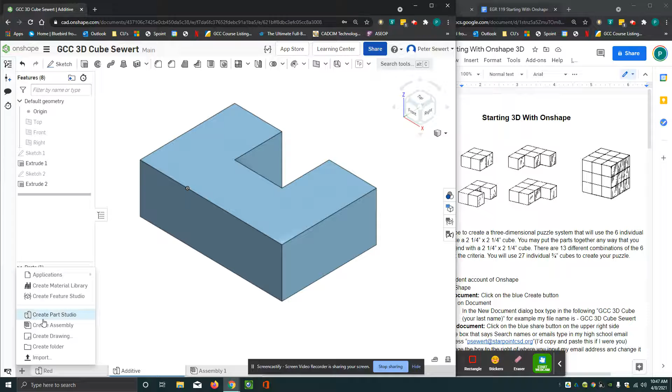So to start a new puzzle part, I'm going to hit the plus sign and create a part studio. I'm going to get my 3 views on here, my 3 work planes. I'm going to click on sketch, and I use the front work plane frequently. Right click and say view normal to.

Now I'm going to draw this U-shaped cube again. I know that we are 2 cubes high, and because each one of these blocks is 3/4 of an inch cubes, this is going to be 1.5 inches tall by 2.25 inches long.

So rectangle tool, I'm going to click on the origin, pull it out, click and type in my length, 2.25. Oops, I got to turn on my numbers like that. 2.25. That worked. Okay, good.

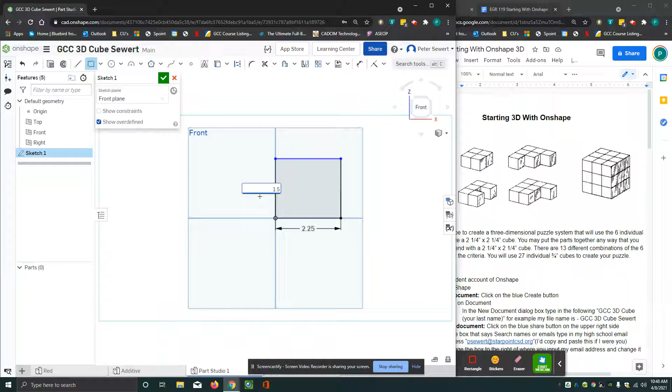Now I'm going to bring my cursor, hit enter there, and it puts me into this other dialog box. And I'm going to make that 0.75 times 2 is 1.5. All right, green check box.

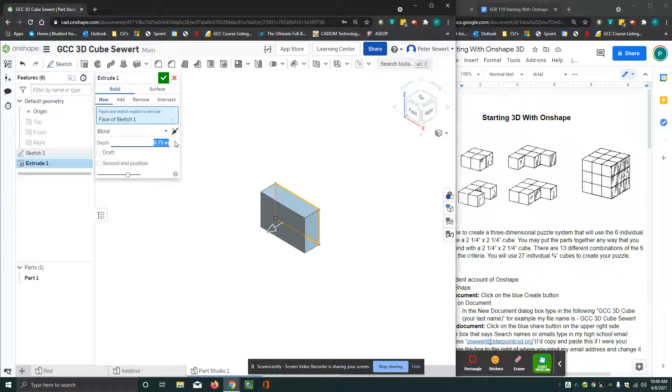Right click, isometric. I'll turn off the icons, and I am going to extrude this, and this is going to be a 0.75 inch extrusion, and I'm going to green check mark.

So we've got all this drawn here, with the exception of the center section being taken out.

So I'm going to now click on sketch. I'm going to go to this front surface and click on it, and right click and say view normal to. And all I did there was create my sketch on the front surface of this cube.

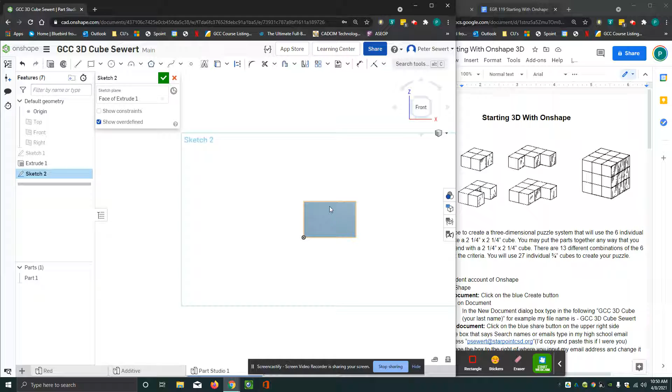Now I'm going to zoom in so you can see this nicely. I like to work zoomed in, I don't like working on stuff like this. Matter of fact, working on something like that cost the company I work for once a lot of money because I misdimensioned something. All right, excuse me.

Here we go. I'm going to use the rectangle tool, and I'll come to this upper line, and you'll notice it turns orange, meaning it's constrained to that line, which is what I want. I'm going to pull this down to the lower right corner, and as long as you start somewhere along the top of this line to the left of the middle and pull it down, you're fine. You'll notice all these lines are bright blue, meaning they are not constrained yet.

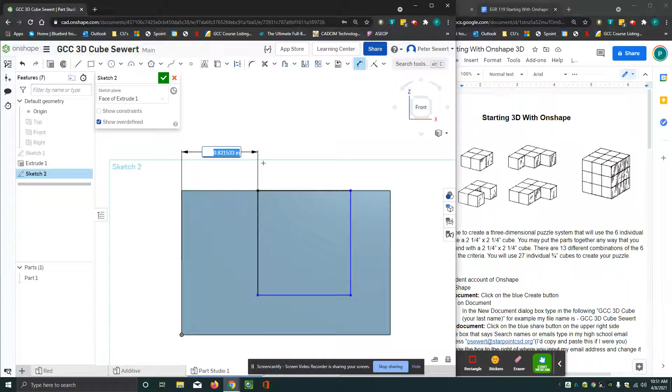So to constrain this, I'm going to start putting some dimensions on. I click on the dimension tool, and I'll zoom out so we get a little room here. To do this dimensioning, I'm going to click on this line on the left and this blue line right here, and select. I know that is the length of 1 cube, which is 0.75.

Now I have a choice here. I can do chain dimensioning, which is perfectly fine to do here if I want to. My dimension tool is still going, so I'm just going to click on this line and pull this down here. I'm going to put in 0.75. So now the distance from here is 0.75, and from here to here is 0.75. Notice this line is black.

The only one that's still blue, because it's not fully constrained yet, is this guy right here. And the constraint that it needs is the length of this right here, and that's got to be 0.75 also.

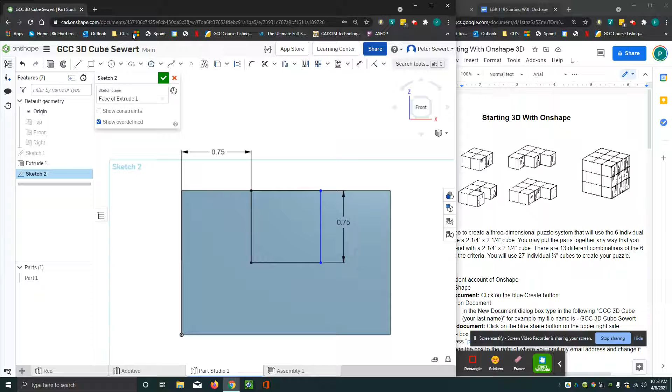Now, the other way I could have dimensioned this, and I'm going to just delete this dimension, is I could have done this for my dimension. I'll start my dimension, click on this line, and go to this one right here, and that is also a perfectly fine way to do this.

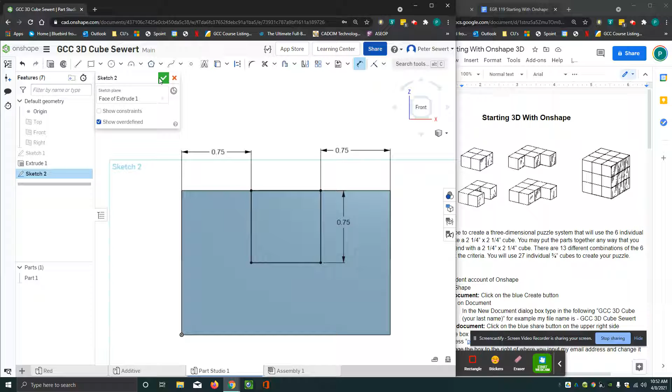All right, so everything is dark on here, which means that the thing is fully constrained, and you really, really want to have things fully constrained. I'm going to hit the green check box, right click, isometric.

This is subtractive, so I'm going to click on the extrude, and I work from top to bottom. This is not a new thing, we're not adding anything, we're removing. So when you subtract, you remove. So I click on remove.

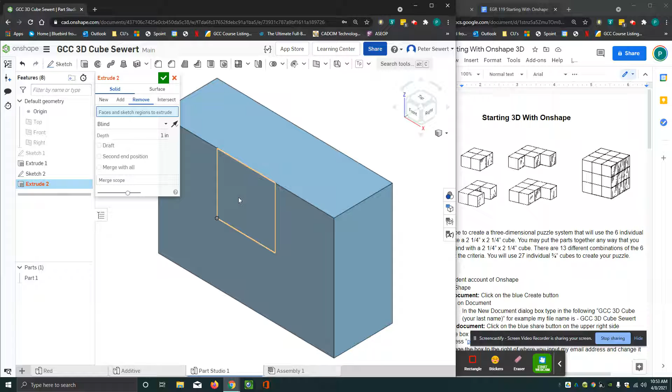Now it wants me to select what I want to remove, which is this cube right here. Instead of this saying blind 1 inch, which would work for what I want to do, it's better practice CAD-wise to click a different extrusion technique. You can choose up to next, up to face, up to part, up to vertex, or one I probably, and myself, use mostly, which is through all. You can see the preview changed there.

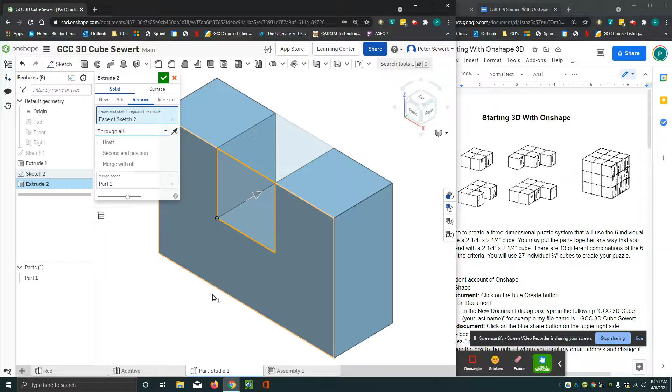Now I just hit the green check mark, and there is my cube done subtractively.

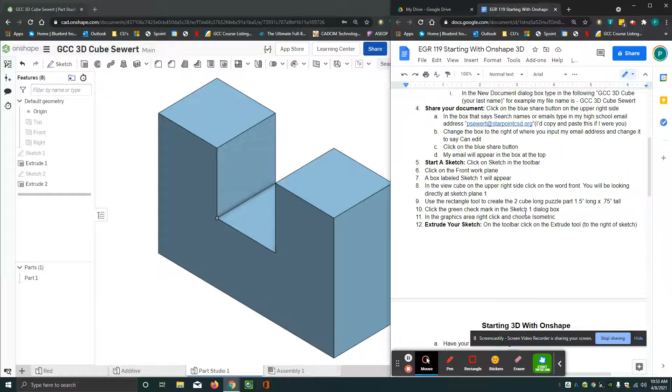Now, just like in the very first one that we practiced together, you're going to change its material to ABS, and you're going to change its color to whatever you'd like it to be. You can then go down here to Part Studio number 1, that's what this is called, and you can change its color to match the color you've picked for the cube.

Okay? All right, so that is subtractive modeling.